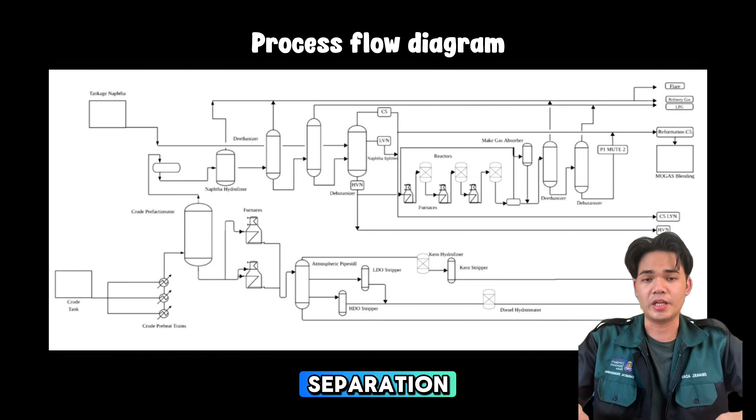First, the process begins with crude oil preheating and separation. Crude oil is passed through preheat trains using heat exchangers, which recover heat from outgoing product streams to save energy. This preheating reduces the load on the main furnace and improves the plant's overall energy efficiency.

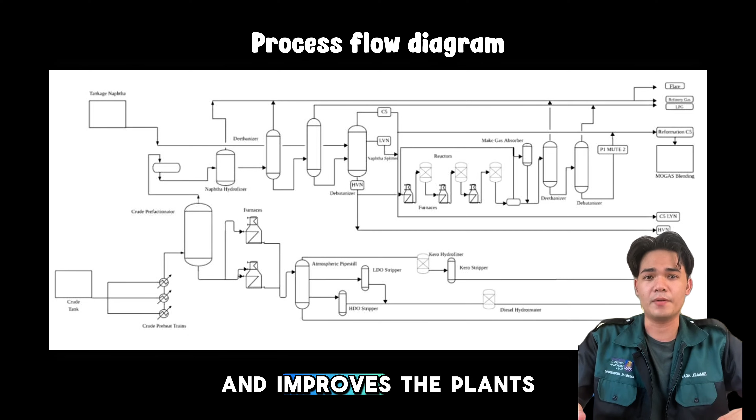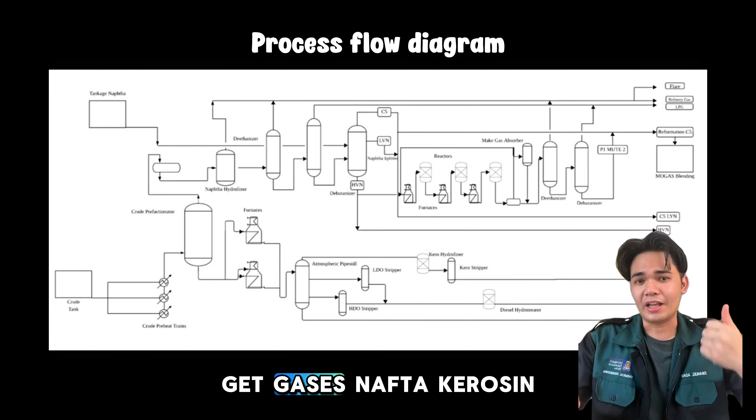Once heated, the oil enters the atmospheric distillation column, where it is separated into different hydrocarbon fractions based on boiling points. This is where we get gases, naphtha, kerosene, diesel, and residue.

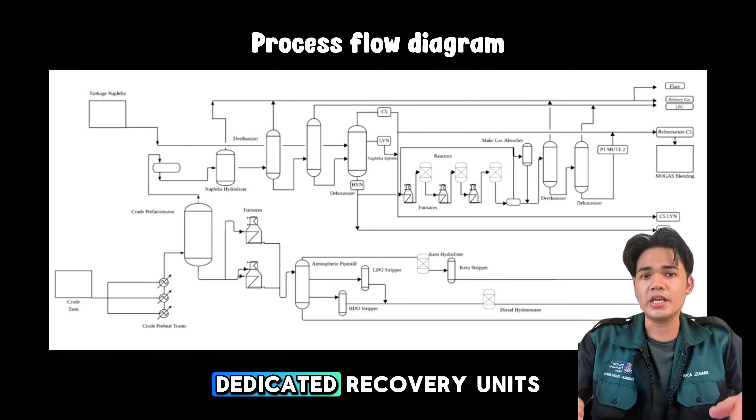Second, the gas recovery and flare system come into play. Lighter gases such as liquefied petroleum gas and refinery gas are sent into dedicated recovery units. However, not all gases are usable, and some toxic or flammable gases, often byproducts of the process, are safely combusted and released through the flare system. These flares are essential for safety and environmental control.

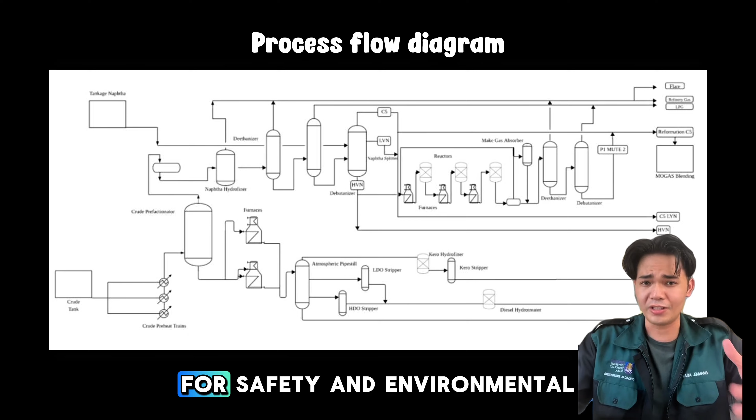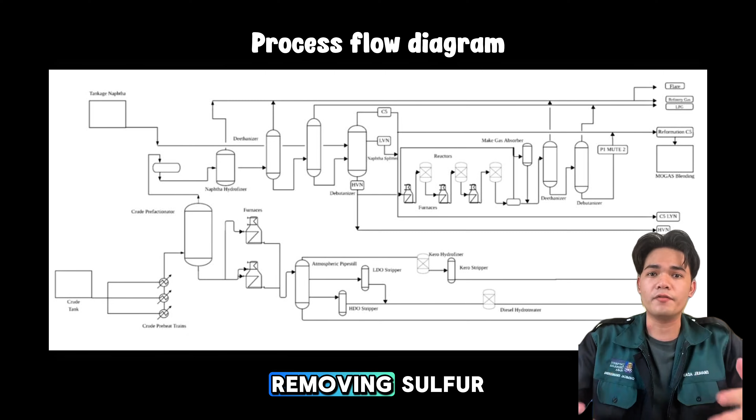Third, we focus on naphtha treatment and stabilization. Heavy virgin naphtha undergoes a process called hydrofining, where sulfur is removed using hydrogen and catalyst. This is important because removing sulfur helps improve the quality of reformate, which is a high octane component in gasoline.

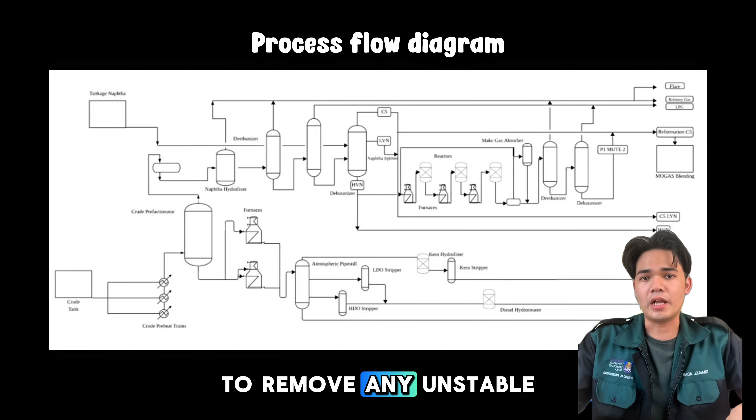Lighter naphtha, on the other hand, is directly blended into the fuel pool. Stabilizer units are then used to remove any unstable components from the naphtha and to ensure the final product remains consistent and safe during storage and transport.

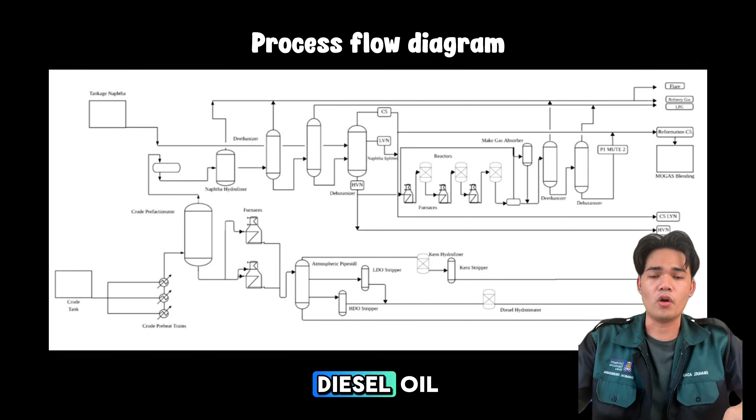Number 4 is the refinery recovers middle distillates, which include dual purpose kerosene and automotive diesel oil. These are drawn from the side stream of the distillation column. However, they often contain impurities, so they go through a stripping process to remove light hydrocarbons and water, which help improve product purity and prevent quality issues during combustion.

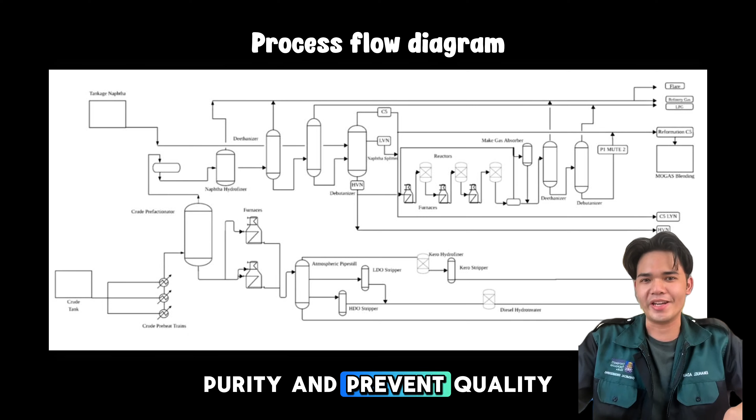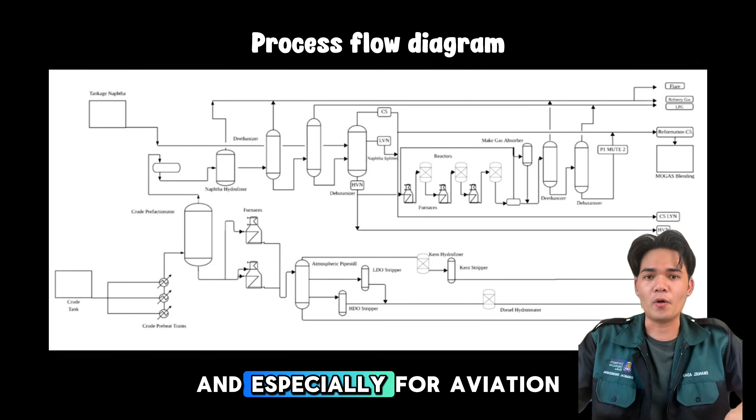Number 5 is further hydrofining treatment is applied to kerosene. This ensures that the final kerosene product meets environmental sulfur specifications, especially for aviation use, where clean burning fuel is essential to reduce harmful emissions.

Number 6 is we reach the bottom of the distillation column, where the low sulfur waxy residue is collected. LSWR is a heavier product that can either be used as low-grade industrial fuel or sent for further processing to extract more valuable products, and its usage depends on economic and operational needs.

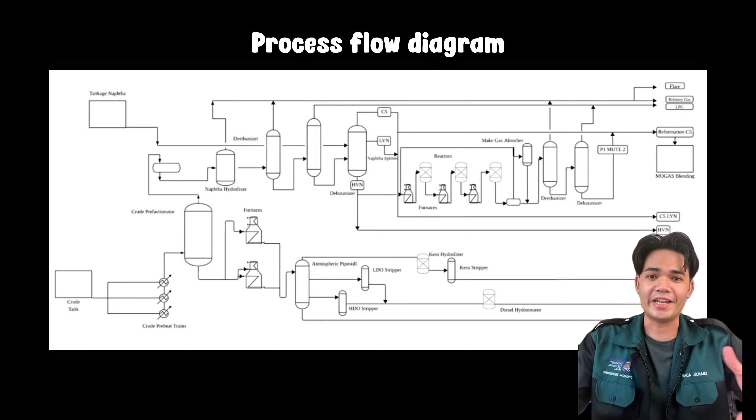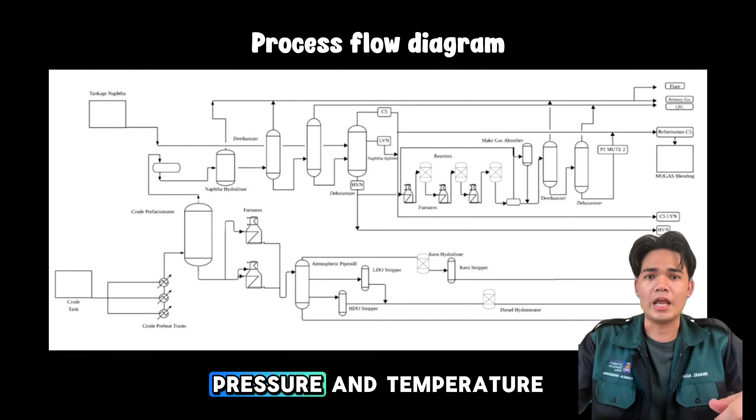Finally, all these processes are supported by integrated plant operations and safety systems. This includes equipment like heat exchangers, pumps, compressors, and safety flares, which regulate flow, pressure, and temperature. Additionally, desulfurization units and emission control systems ensure compliance with environmental standards while also optimizing fuel yield, quality, and energy efficiency.

Petron Malaysia Refining and Marketing Berhad, like many companies in the petroleum sector, faces a number of critical environmental challenges that directly impact their local ecosystem and surrounding communities.

First, one of the most serious issues is air pollution from emissions at the Port Dickson refinery. The combustion of fossil fuel results in the release of sulfur oxide and nitrogen oxide, which are harmful air pollutants. These compounds contribute to the formation of acid rain and smog, and can also cause respiratory disease such as asthma, bronchitis, and chronic cough, especially in communities living near the refinery.

Second is the issue of oil spill and leakage. During the storage and transportation of petroleum products, accidental leaks can occur. These spills can contaminate soil and freshwater sources, destroying plant life and reducing the quality of drinking water. Marine species and other aquatic life can also be affected when oil reaches nearby rivers or coastal areas.

Third is runoff from fuel loading activities, which can pose another environmental concern. If loading operations are not well managed, excess fuel or chemicals can wash into the drainage system and flow into natural water bodies. This kind of pollution can damage marine ecosystems, affecting fish populations and coral reefs, which in turn threatens the livelihood of local fishing communities.

Fourth, Petron must also address greenhouse gas emissions and climate impacts. Refinery operations release significant quantities of carbon dioxide, a major greenhouse gas contributing to global warming, which can lead to shifting temperature and rainfall patterns, harming agriculture, biodiversity, and water resources in the surrounding area.